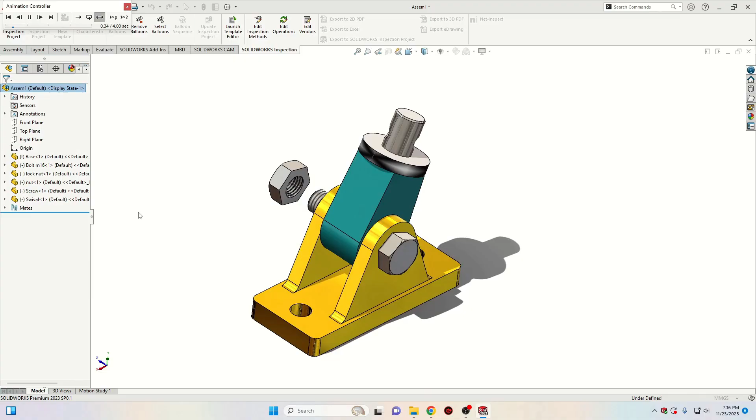We have here the drawing. It's not my drawing, as you can see. I found it on Pinterest, from CAD/CAM tutorial. So I don't intend to steal it or anything like that, but I'm gonna use it to make my own tutorial.

And we're gonna start with the base. As we can see here, we have 6 components. So let's go ahead and start it. This is how it's going to look at the end. And we can see on the drawing we also have a material, so we're gonna apply that material.

Alright, let's open a new SolidWorks document, select here part, and now let's select here plane and let's open a sketch in the top plane. And here to make that base we'll start with a center rectangle.

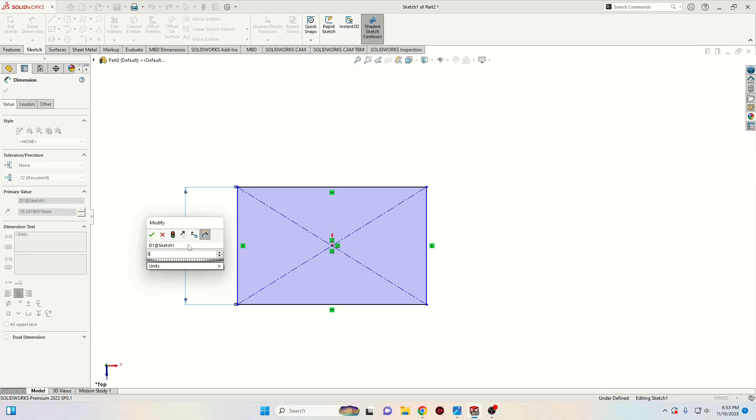And now it's smart dimension, let's define it. First here will be 58 millimeters, and here will be 132. And now let's make a center line, make it vertical like this, and then select circle, and let's make a circle here.

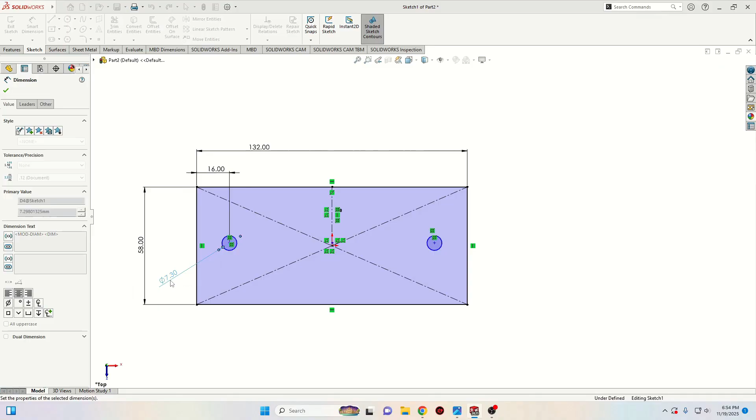Select this circle with this center line and select here mirror entities command. And now it's smart dimension, let's define this. From this center point to this line here will be 16 millimeters. And this circle will have the diameter 14. And now select this center point with this one and select here make horizontal.

Now go to features, use extruded boss base command, and here the thickness - first here we'll keep blind, and here the thickness will be 14 millimeters. Press here OK.

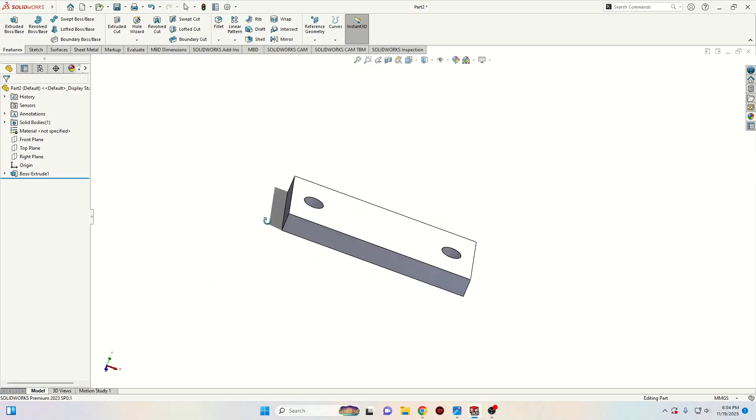And now let's open a sketch in the front plane, where we're gonna make the next sketch. Select line, and we'll start like this, and here we'll make an arc, and then back to this point. Now select this point and select here make tangent. Now select these two lines and make them equal.

Select this center point with this origin point and select here make vertical. And now it's smart dimension, let's give a radius for this arc, and here will be 20 millimeters. And then this line here will have 75. Okay, and now from this center point to this edge here will be 54.

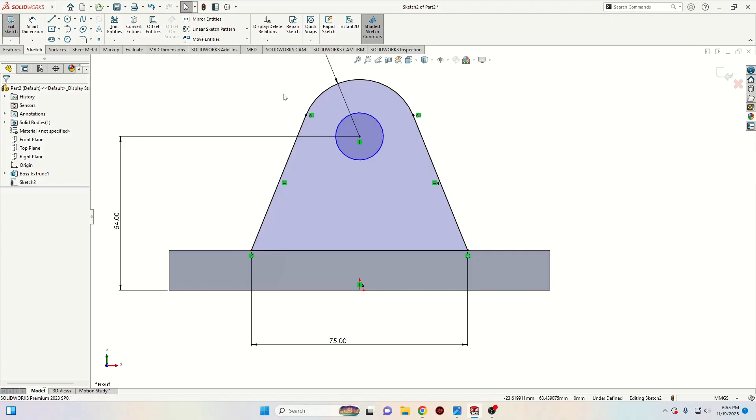And now select circle again and let's make another circle in this center point. Make sure that it's concentric with this arc. And now smart dimension, let's give a diameter for this circle and it will be 16 millimeters.

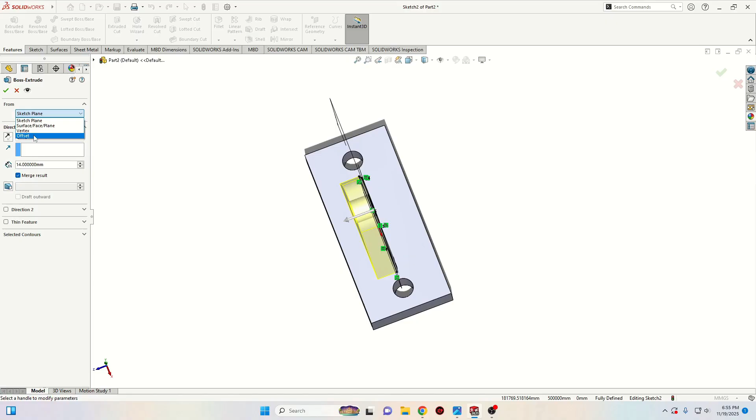Alright, and now we'll go to features and we'll use extruded boss base command. First we're gonna select here, instead of sketch plane at from, we'll select offset. And the offset will make it 16 millimeters. And then here we'll select blind and here we'll make it 10 millimeters. And this should be good.

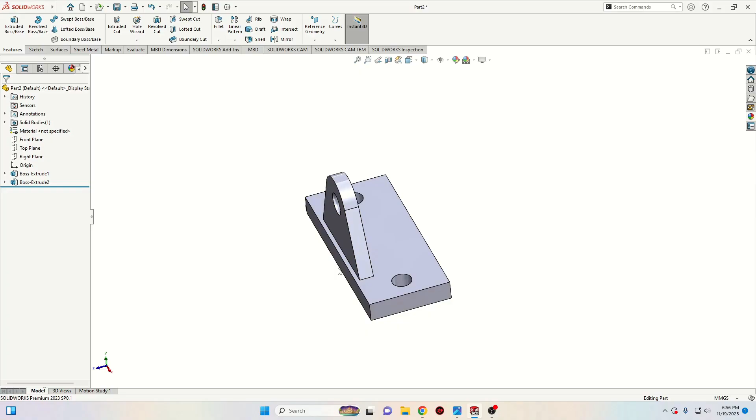Press OK. And now from the drawing we can see that this should have the thickness 10 millimeters, and from this face to this one should be 3 millimeters. To check that, we'll go to evaluate, select here measure. And first let's check from this face to this one. We can see the distance is 3 millimeters, as stated on the drawing.

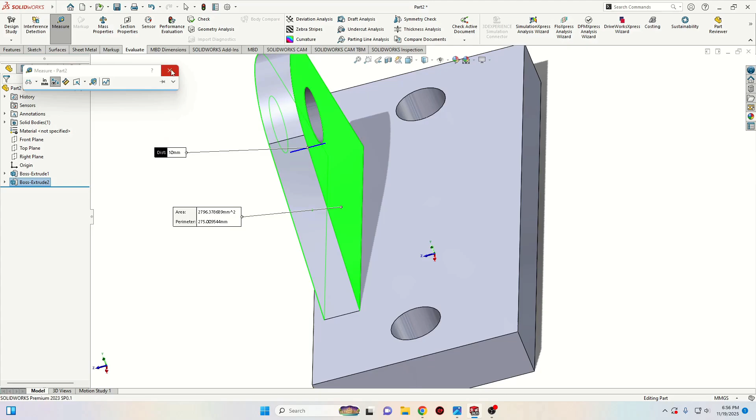And now let's check the thickness for this. It's 10 millimeters. That's good. And I'll have to make another one like this on this other side.

To do that, we'll go to features, extruded boss base command. We're gonna use the same sketch. Go to boss extruded 2, select sketch 2. The same, we'll select here offset. This time we'll have to reverse the direction.

And this will be the same distance, 16 millimeters. And here we'll have to reverse the direction again, and it will also be 10 millimeters. Now from the preview it's looking the same.

Press OK, and now we have the second one. Now what we'll have to do is to apply some fillets. So select fillet, the radius will be 5 millimeters, and we'll select first this edge.

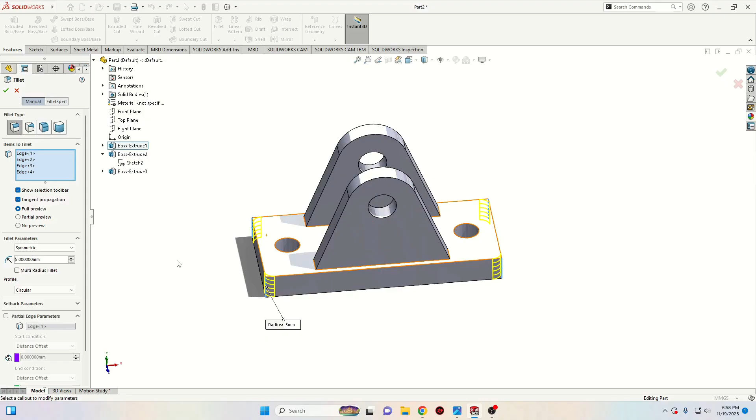And we'll go ahead and select this one, connect it to start loop. We must have all these 4 edges, and then we're gonna select this one, and we'll select this one, connect it to start loop again to have these 2, or you can just select them like this. And in total we should have 8 edges. Press OK.

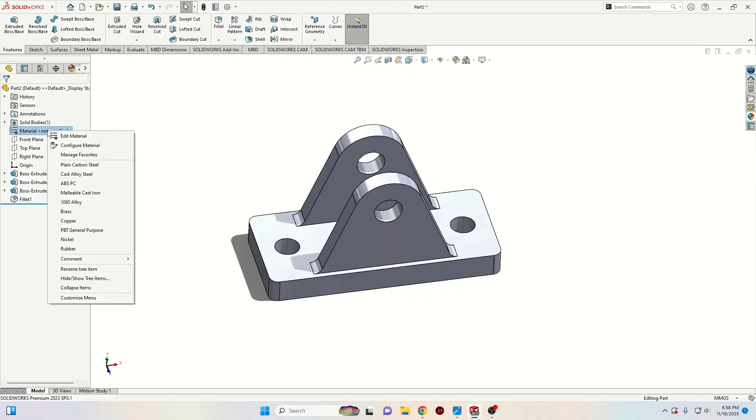And now this should be the base. And what we'll have to do next is to apply the material. So right click on material, edit material, and we'll select this one. AISI 1020, you can see here the density, and press here apply and close.

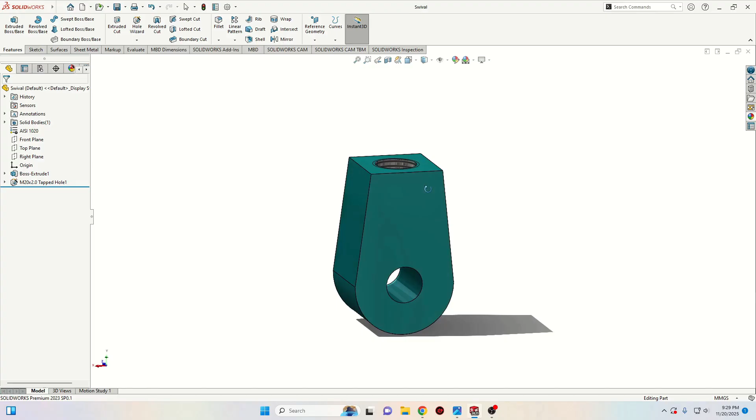This is how it's going to look. It's very easy. Now let's open a new SolidWorks document, select part. Let's make this plain white, and let's open a sketch in the front plane.

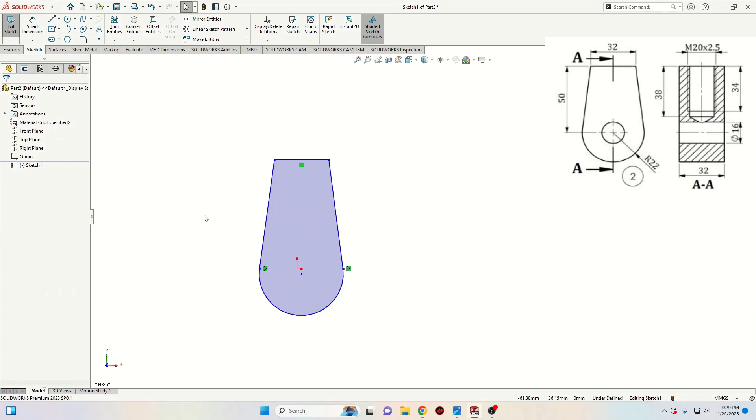Here we'll make the next sketch, and now we'll make an arc. Select Smart Dimension and let's define this. Here will be 32 millimeters. And here will be radius 22. From this point to this line here will be 50.

Now let's make these 2 equal, and let's make these 2 vertical, sorry. Now select this one with this one and select coincident. Okay, now let's select circle again and make here another one. This one will have the diameter 16.

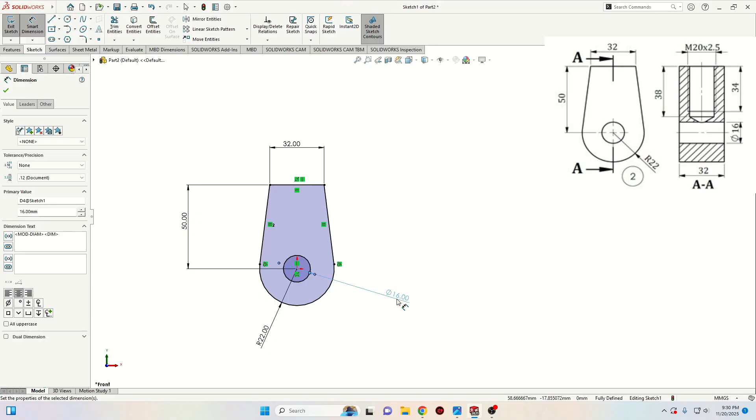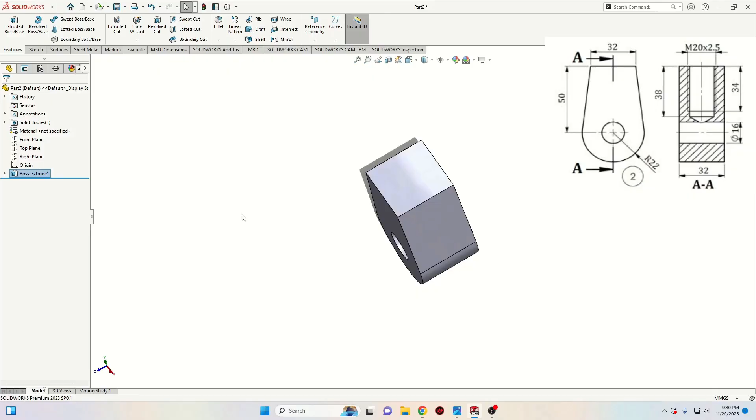And now go to features, use extruded boss base command, and here we'll select mid plane, and the thickness will be 32 millimeters. Press OK. And now we'll have to make that hole.

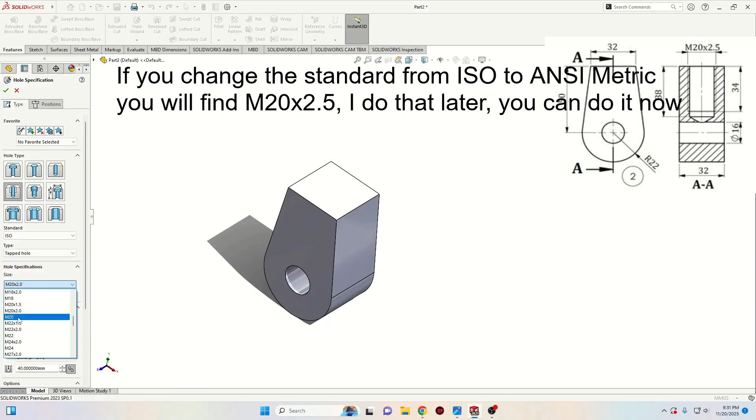To do that, we'll go to hole wizard. Select hole wizard. We're gonna select this one, straight tap. Here standard will keep ISO, and here we'll select tapped hole. Here the size, as we can see, is M20 with the pitch 1.5, 2, and M20 simple. So we're gonna use this one.

Let's see, for M20 simple there's no pitch. Alright, so we're gonna use pitch 2 instead of 2.5. And here end condition will be blind. This will be the depth for our hole. And we select here depth up to shoulder, and it will be 38. And here the depth for the thread will be 34.

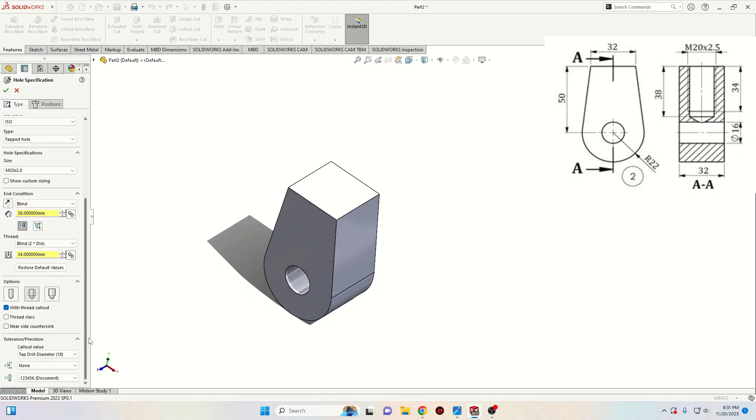Alright, and here we'll keep this one, cosmetic thread, and everything else should be the same. Now go to positions and select 3D sketch. We're gonna place it like this, and then to position it, we'll select center line, and we'll make a center line like this, and then one like this. Make sure that this one is in the middle point for this edge, and this one starts from this middle point from this edge. And this one should be along x-axis, and this one should be along z-axis.

And I will select this point with this point from the hole and select here make coincident. Now this is in the center. Press here OK. And now this is the hole. Now we cannot see the thread.

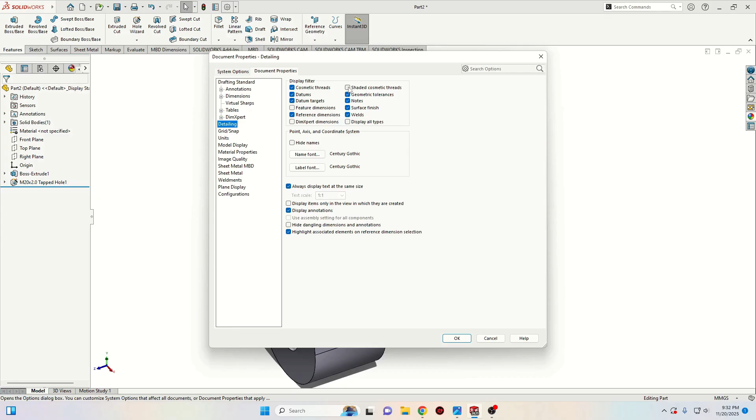To see the thread, go here to options, go to document properties, go to detailing, and we can see here on the right shaded cosmetic threads. Select this and press OK. And now we can see the thread.

Now what we'll have to do is to apply the material. Right click here on the left on material, edit material, and we'll have to select from steel this one. Press here apply and close. And this is the second part from this assembly. Don't forget to save it.

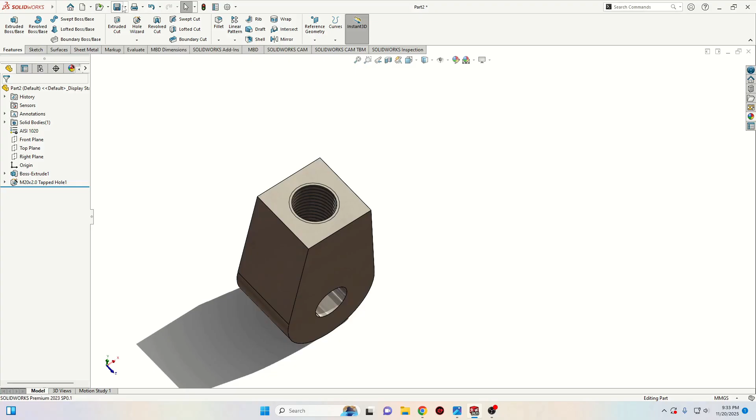This is going to be very easy. Now let's open a new SolidWorks document, select part, and let's make this plain white. Now we'll open a sketch in the top plane. And here we'll select circle and we'll make a circle with diameter 16 millimeters.

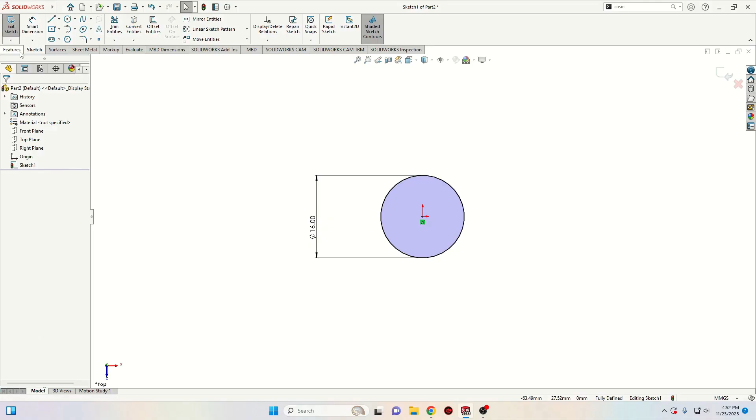And now go to features, and here we're gonna use extruded boss base command. And here will be 68 millimeters. Press here OK. And now we'll select this face and we'll open a new sketch.

We'll select polygon and we'll make one like this. Then select this center point with this point and select here make vertical. And now with smart dimension, let's give a dimension from this point line to this line. And here will be 25.

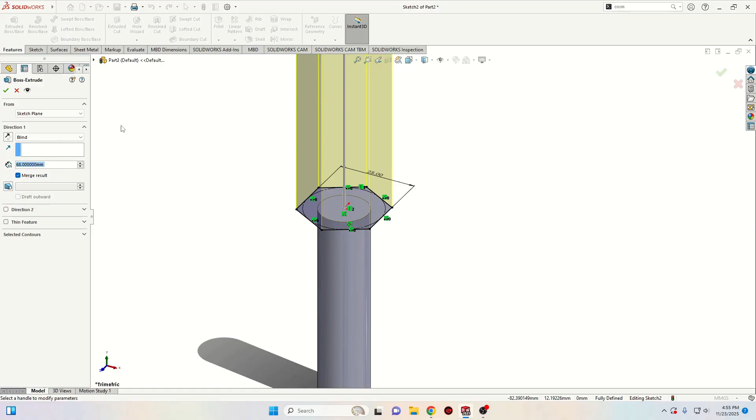Now go to features, use extruded boss base command again. And here will be 10 millimeters. Press here OK.

And now let's open a sketch in the right plane. And here let's start with a center line. Make it starting from this midpoint to this one. And now we'll select 3-point arc. And let's make here an arc.

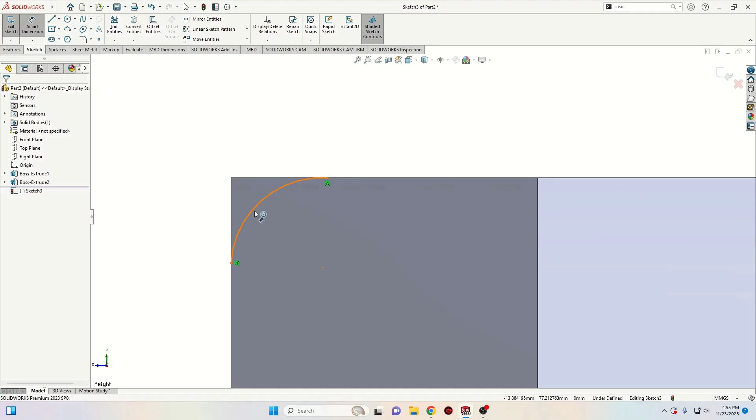Make it like this. And then with smart dimension, let's give a radius. Here will be 2 millimeters. And now select line and let's close this sketch like this. Then select this point and select here make tangent. Do the same with this one.

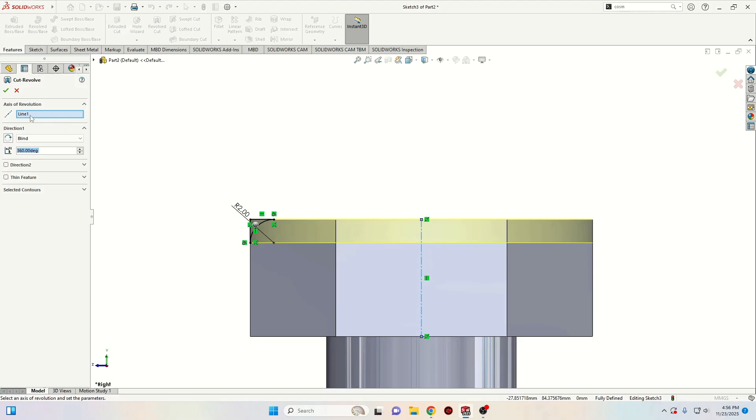And now we'll go to features again and we're gonna use revolved cut. This center line should be selected here and here we'll keep these settings. Press here OK.

Alright, and now for this thread here, that is a cosmetic thread. So we don't have to do many things about it, we'll just have to find it. If you don't know where it is, you have to go to Insert, Annotations, and then you can find it here, Cosmetic Thread.

You can go up here to the right at this search icon and just write cosmetic and it should appear. And if you want to see where it is, show command location, click on this eye icon and it's going to get you to the command you are looking for. See, right here from annotation, it's going automatically there. So yeah, let's insert it.

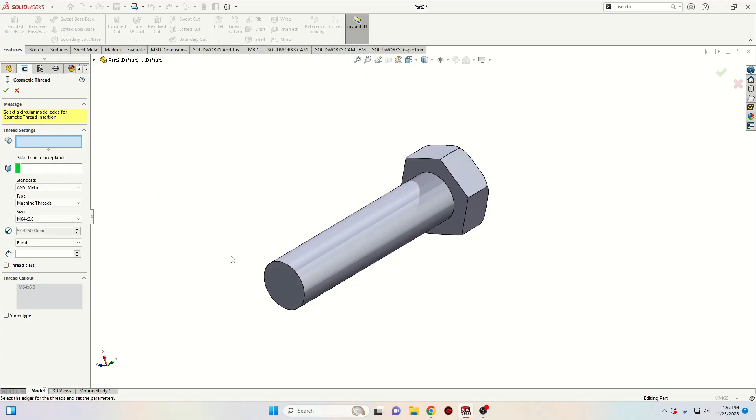So select cosmetic thread. Here we'll have to select the edge. The starting edge will be this one. Here the start face or plane, we can select this one. And here at standard, I am always using ISO, but the problem is that we don't have M16 with 2 millimeters pitch.

So I've seen that at ANSI Metric. Here it is. We're gonna keep the type machine threads and the size M16 with pitch 2. And here we'll keep blind and here 20 millimeters. And now press OK.

Now we cannot see it because this is cosmetic. We'll have to go up here to Options, Document Properties, Detailing, and then select shaded cosmetic threads. Press OK, and now we can see it. Now the last thing that we'll have to do is to apply a chamfer. So select chamfer. The dimension will be 1 millimeter, and the angle will be this one. Select this face or this edge and press OK.

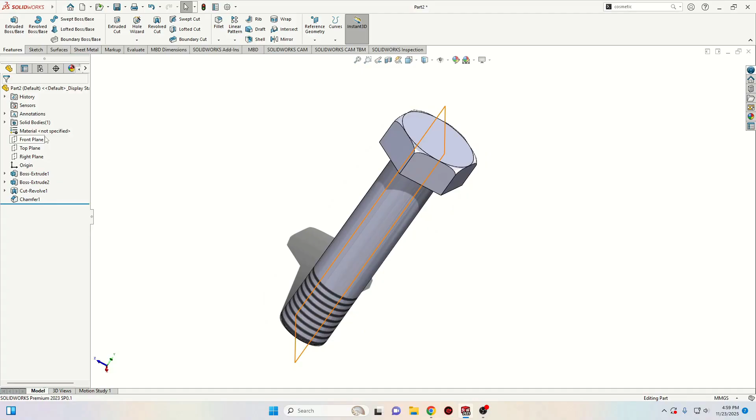And now let's apply the material because we have it on the drawing. Right click on material, select edit material. All the components will be from this material, steel AISI 1020. Click apply and close. Alright.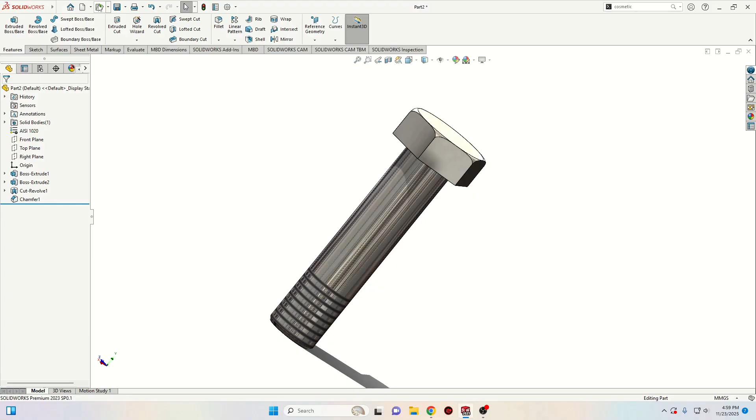And now the last component, the swivel, let's open it. We have to change something, this hole right here, because I couldn't find the one with the pitch 2.5 as specified on the drawing. Right click on it, select edit. It's because at standard I'm always using ISO, but if we go again to ANSI Metric, we have the size we need, M20 with pitch 2.5.

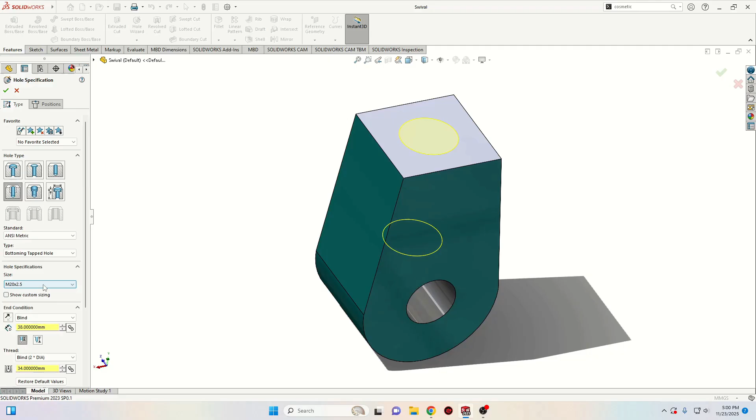So let's change this one to M20, because this is how it's on the drawing, and keep all the other settings the same. Press OK. And now everything is according to the drawing. Don't forget to save them both.

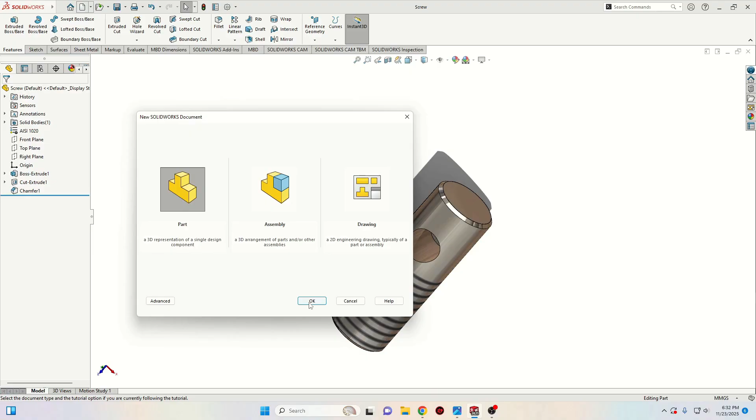Let's go ahead, we're gonna start with this screw. So let's open a new SolidWorks document and make it plain white. Now we'll open a sketch in the front plane and select circle. This circle will have the diameter 20 millimeters. Go to Features, use Extruded Boss/Base command, and here will be 56.

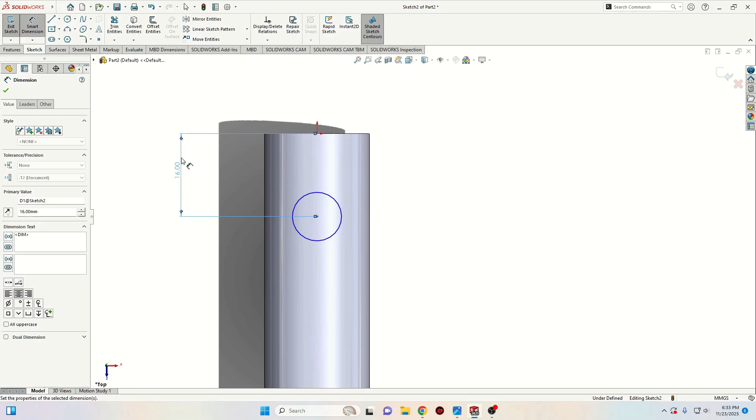And now we'll open a sketch in the top plane. We'll make a circle. With smart dimension, let's give a dimension from this center point to the origin point, 16 millimeters. And this circle will have the diameter 10.5. Now select this point with this one and select make vertical. Go to Features, use Extruded Cut, and instead of blind select Through All - Both. Press OK.

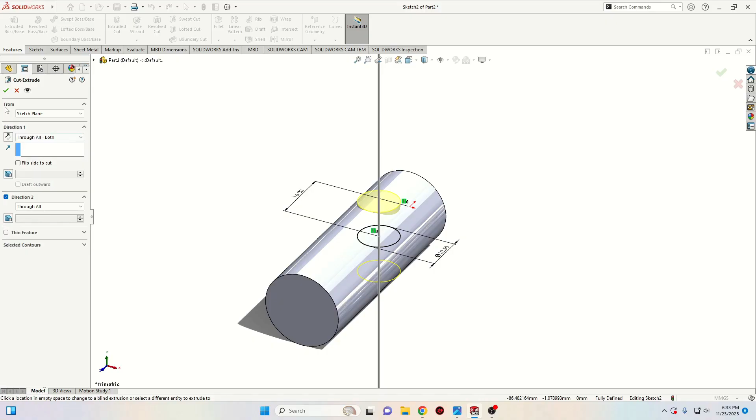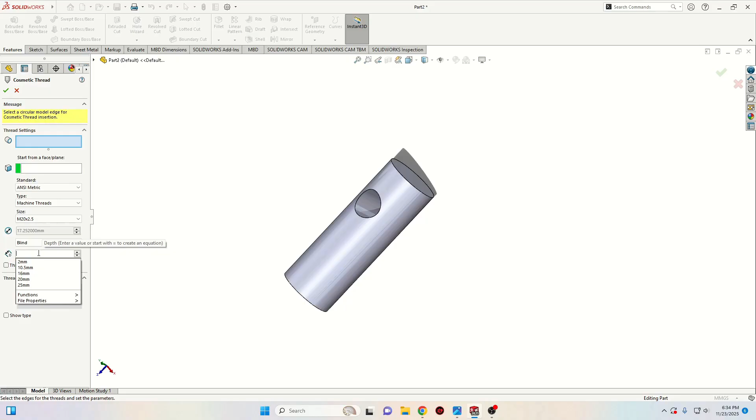Now I'll have to apply a cosmetic thread, actually a thread, not a fillet, on this side. Go to this arrow, Insert, Annotation and select Cosmetic Thread. Here we'll select ANSI Metric, machine threads, and the size will be M20 with the pitch 2.5. Select blind, and here will be 32 millimeters. Select the starting edge, this one, also this face, and make sure these are the same. Press OK.

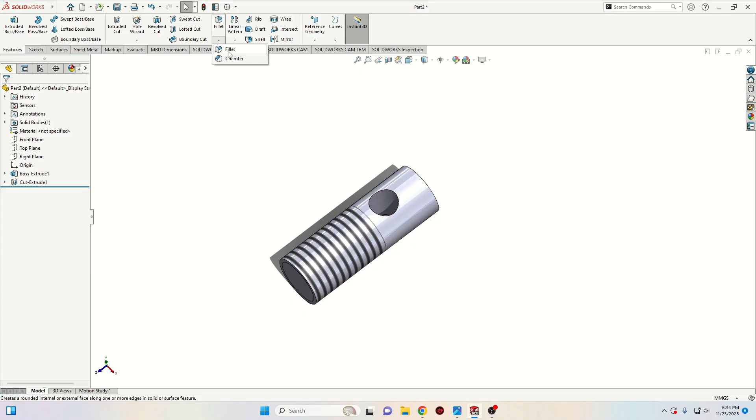And now to be able to see this thread, go up to Options, Document Properties, Detailing, and select cosmetic threads and press OK. Now we'll have to apply a chamfer, so select chamfer. The dimension will be 1 millimeter, this face with this one. Press OK.

And I'll have to apply the material. Right click on material, edit material. All the components will be from this material. Click apply and close. Nice. Now don't forget to save this one, and let's go to the next one. So let's open a new SolidWorks document, part.

The next one will be the lock nut. Let's make it plain white. And now we'll open a sketch in the front plane.

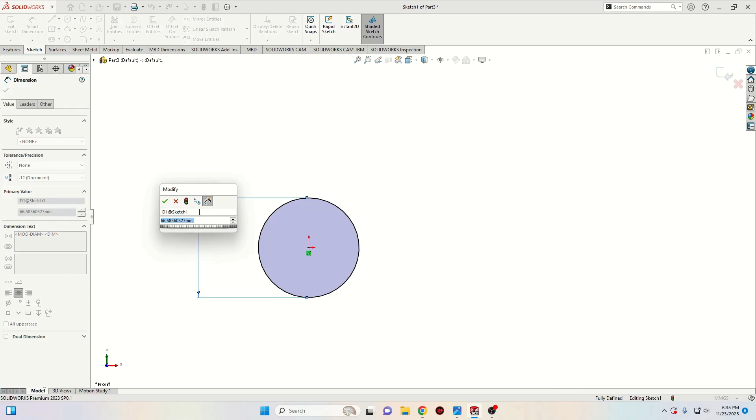Here we'll make one circle. This circle will have the diameter 45. Now go to features and use extruded boss base command, and here the thickness, or the depth, will be 8 millimeters. We'll keep it blind, press OK.

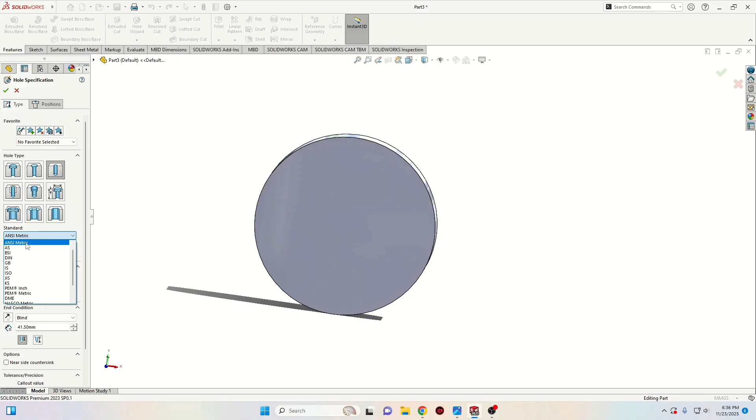And now we'll select hole wizard, and here we'll select hole. Here we'll keep it symmetric. Here we'll select drill size, and here we'll select size 18 millimeters. Let's see if we have it. So let's go ahead and select 18 or 18.5, one of these should be good. We're gonna make it a little bit smaller than our size on the drawing.

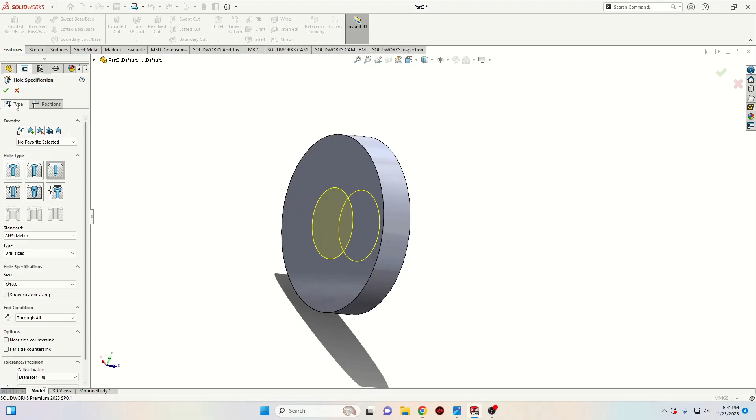Press OK. Actually go to positions, and we'll have to put it in the center of this part. Place it on this face, then select this face with that point and select make concentric. Now press OK.

And now let's see how we can make this thread here. Let's try with cosmetic thread first, then we're gonna go ahead and use this thread from hole wizard. This is more like a real thread because it's gonna cut into this part or extrude, but in our case it will cut. So let's go ahead and use the cosmetic one first.

Go to insert, go to annotation, go to cosmetic thread. Here we're gonna start this. We're gonna select the starting edge, will be this one. And let's see if we can select M20, but we cannot select the pitch 2.5 for some reason. Maybe it has something to do with the dimension of this hole. Anyway, you can use this one. This is just an example, we're not gonna let this one.

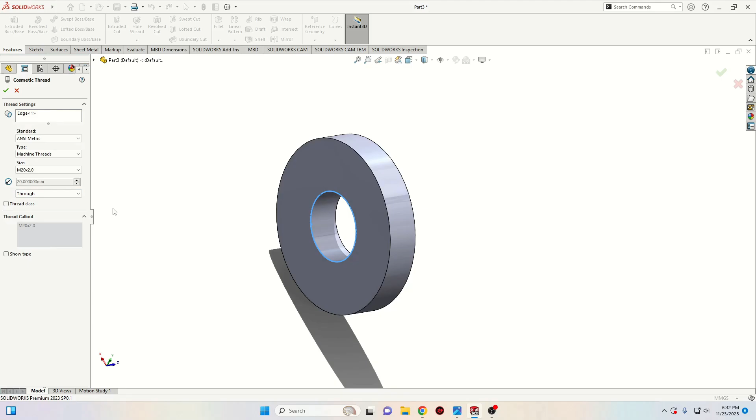And here we're gonna select up to next, or through. I think it should be good, and let's see how it's going to look. Let's go to options and let's make it appear, detailing, shaded. Okay, so it's looking good. We can leave it like this, or let's undo this.

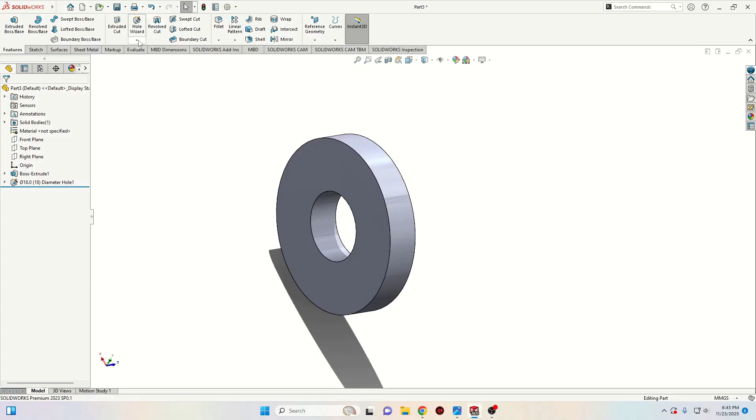We can go to hole wizard, to thread. We'll select the starting edge, will be this one. Here let's make an offset of 2 millimeters and reverse. Here let's keep blind and let's make it 12.

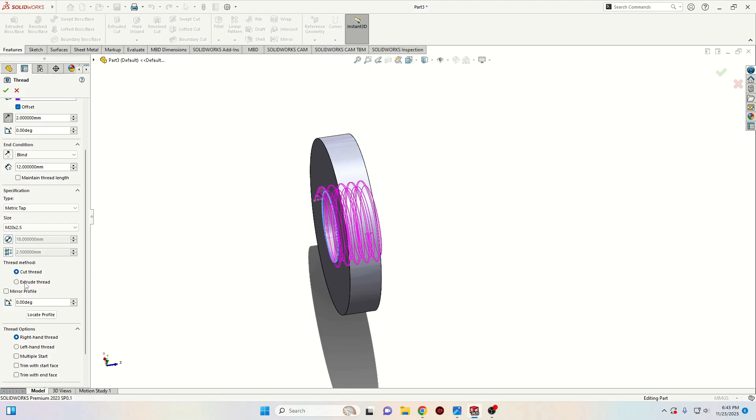Here we're gonna keep metric tap, and here we can select the size we want, M20 with the pitch 2.5. Everything else should be the same. Make sure that here is cut thread, not extrude thread. Press OK. And now this is how it's going to look with this thread, actually real, not just cosmetic. So it's up to you which one you want to use, it has no real importance.

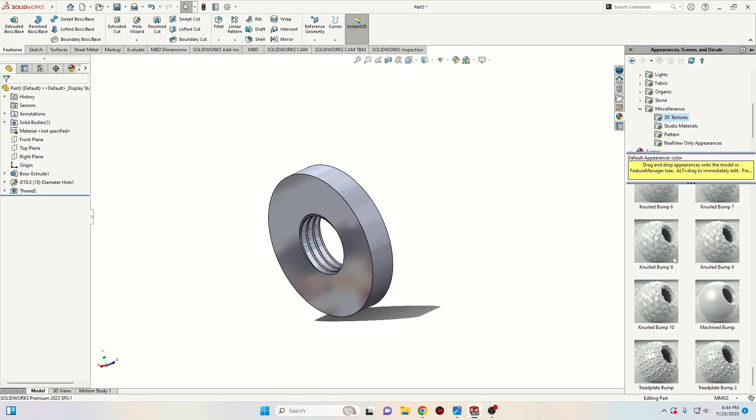Anyway, let's get to the next thing. So what we'll have to do next is change the appearance of this face, because on the drawing it's saying that it's a knurled surface. To do that, we'll go to appearance right here, go to this arrow, appearance, go to the last one, miscellaneous 3D textures. And from here, if we go down, down, down, we can see a lot of knurled options. Just choose one from here, drag it and place it on this surface, and here select face, because we only want this to be on this face.

Alright, now let's apply the material. Right click on material, edit material, and it will be the same material, apply, close. Nice. Now don't forget to save it. So this is the lock nut.

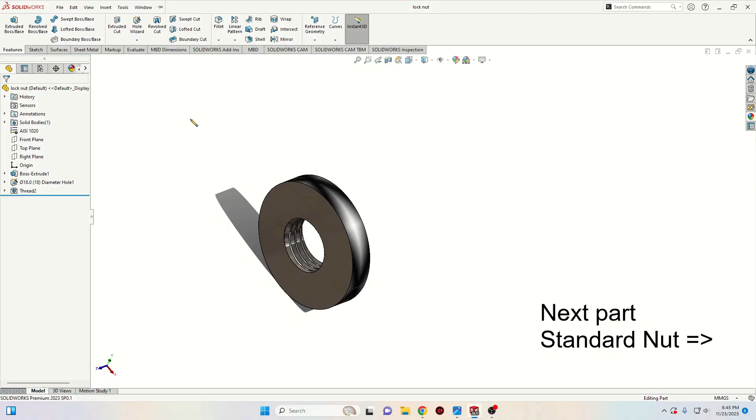Okay, now we'll have to do the last part, which will be the simple nut. Let's open a new SolidWorks document, and let's make it plain white. Now let's open a sketch in the front plane.

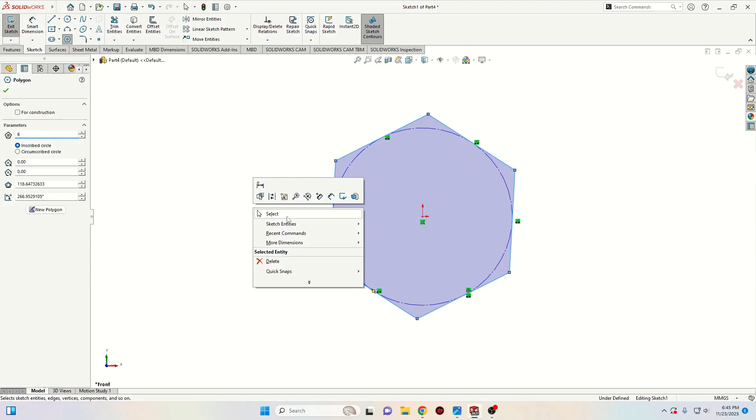And here we're gonna start with a hexagon, a polygon actually, but yeah, anyway. So make a polygon like this, then select these 2 points and select make horizontal. And now smart dimension, let's give a dimension from this line to this one, will also be 25, like it was for the bolt.

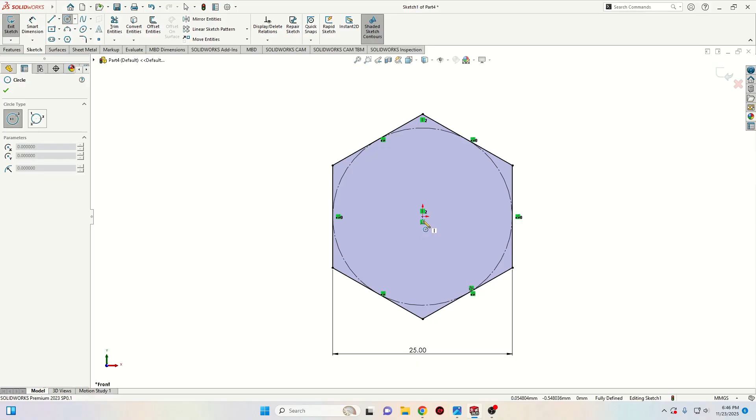And now let's go ahead and make another circle right here. This one will have the dimension 14.

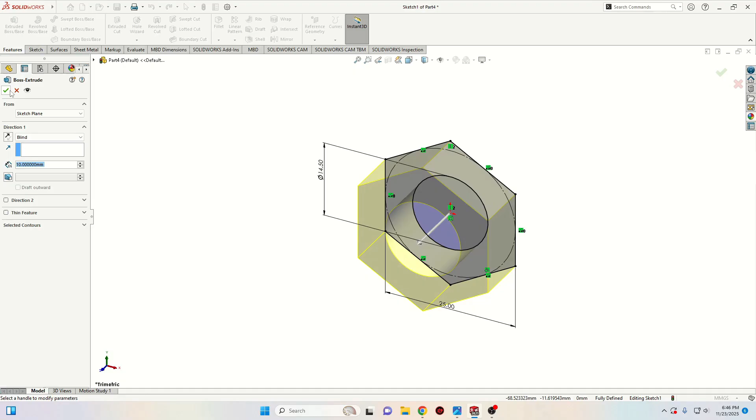Let's make it 14.5. Now go to features, use extruded boss base command, and here will be 10 millimeters. Press OK. And now let's open another sketch in the right plane. And let's select 3-point arc. Let's make an arc like this. Select line and let's close this sketch.

If you saw the tutorial with the bolt, we are doing the exact same thing. Make a center line. And now select this point, make here tangent, this one tangent. Now let's give here the radius, which will be 2 millimeters. Now go to features, use revolved cut, and here should be selected this center line. Press OK.

Now we'll have to apply the thread here. So it should be M16 with the pitch 2. Let's go ahead and use from insert, from annotation, cosmetic thread. We'll keep these settings here and then let's select the size. M16 with the pitch 2. Select this edge as starting point. And here we're gonna keep through. Okay, so I said M16 with the pitch 2.

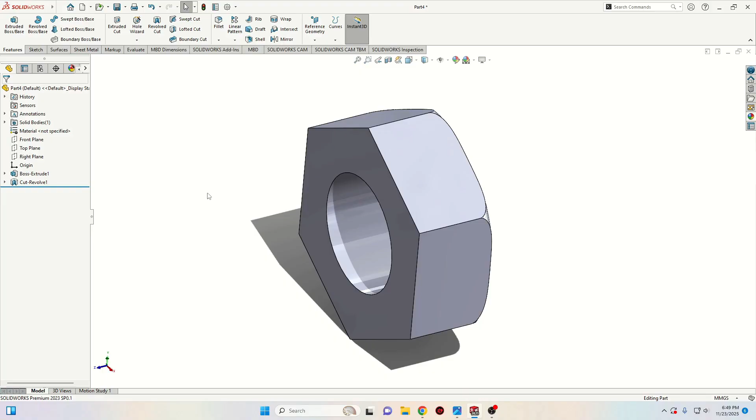Anyway, we can also use the other thread like we did for the other nut, for the lock nut. We're gonna go to hole wizard thread because here we definitely have it. So we're gonna select this. I almost never use cosmetic thread, so offset of 2, reverse, and here is good like this, and the size should be M16 with the pitch 2.

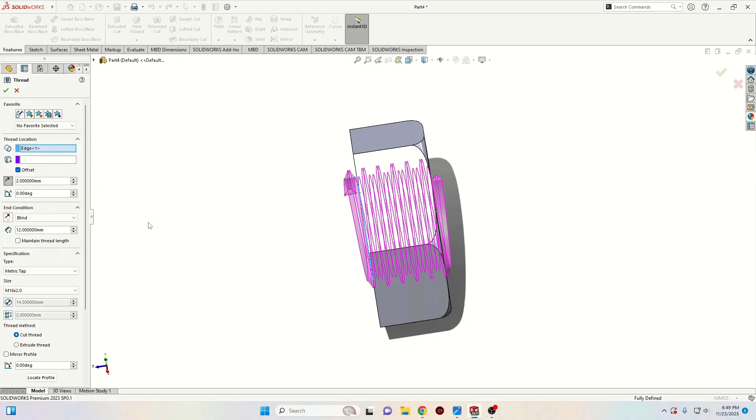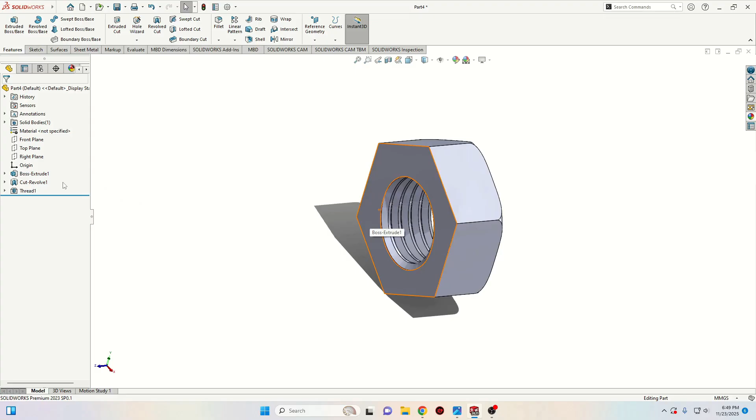Here is way easier, and it's also looking way better. Select here cut thread and press here OK. Now, if you want to use cosmetic thread, you can play with that hole. You can go back here, edit sketch, and you can change this dimension until you'll have there the pitch 2 millimeters for the size M16. But I'm not going to do that because I think it's useless. So I'm gonna leave it like this.

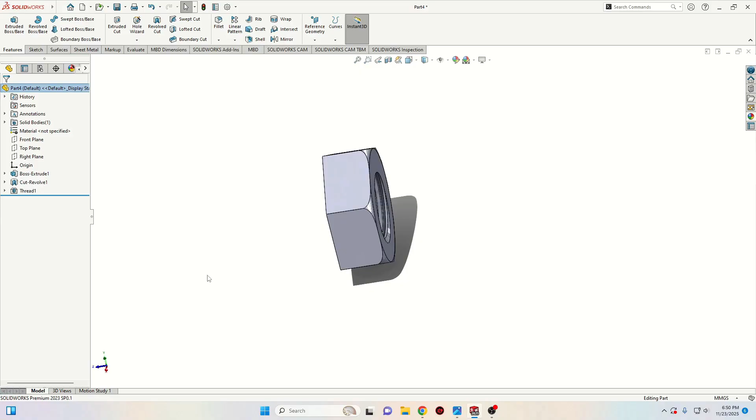Now don't forget to apply the material, edit material, the same one, and close. Now this was the last part. Let's save it.

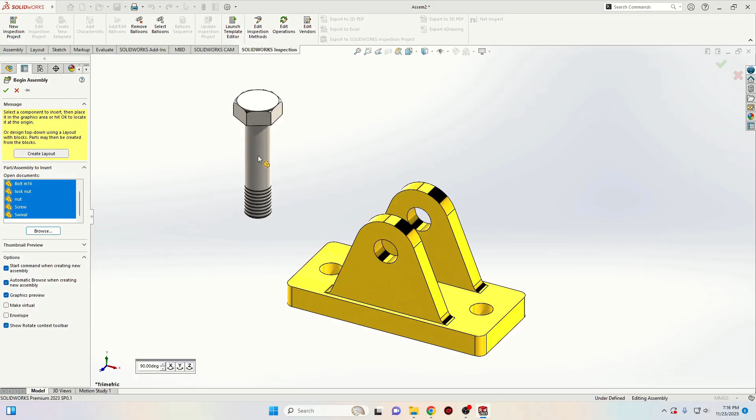We already have all the components, and now let's go ahead and make this assembly. Let's open a new SolidWorks document, select here assembly, press here OK. And now let's browse for our components. So you must have 6 of them in total. Click once for each of them to insert it. And now these are all. Let's make this plain white. And now the first one you will insert is gonna be fixed, so make sure that it's the base. Now let's select this face with this one and select here concentric.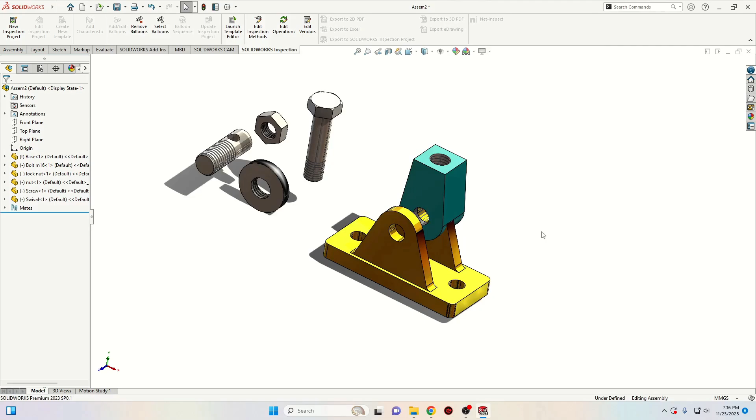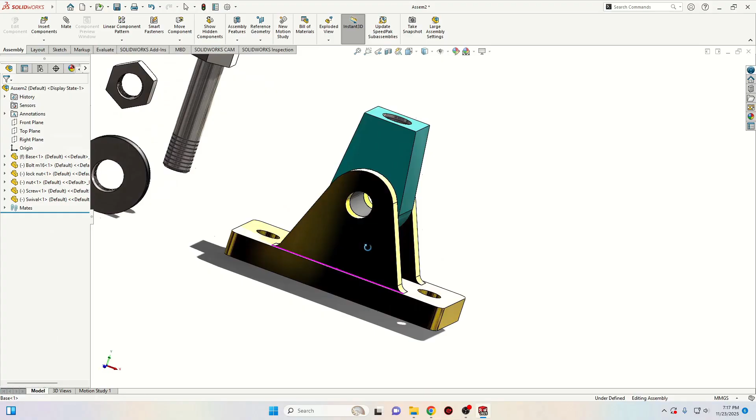And now we'll select these 4 faces and go to assembly, go to mate. And we should have here width. Press OK. Now we have to limit the movement of this swivel a little bit because it's going like this. To do this, first let's find which planes are coinciding for this base and this swivel.

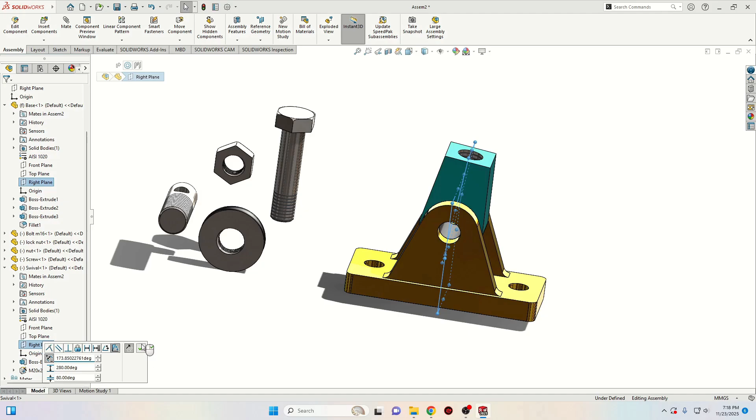To do this, first click on this arrow from the base. We can see the right plane. It's right here in the middle of them. Go to swivel. Let's see if we have a plane just like this, and it will be also right plane. With Ctrl pressed, select them both, and then select here limit angle. The maximum angle, let's make it 280, and the minimum angle, let's make it 80. And let's see. This is looking good.

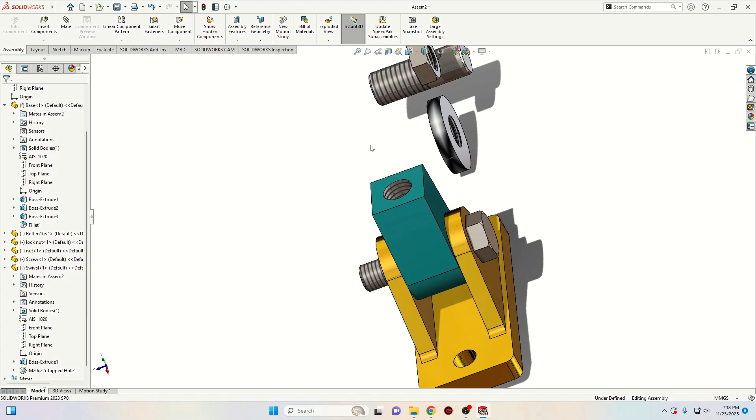And now let's assemble the other components. This bolt, select this face with this one, select here concentric. And now let's drag it a little bit like this. Select this face with this one and select here coincident. Alright, now let's put this nut. Select this face with this one, select here coincident. Select here reverse the direction, and now we'll select this edge, a round edge with this face, and select here concentric.

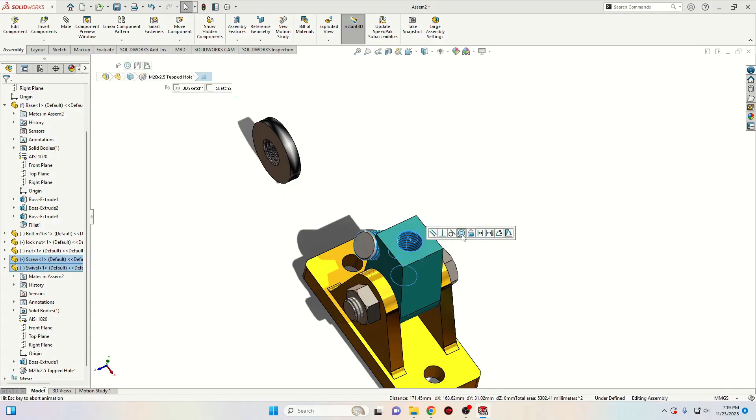And now let's insert this screw. Select this face with this one and select here concentric. Reverse here the direction. And now let's insert this lock nut. We'll have to select this face with this one and select here concentric. And now let's drag it up. Select this face with this one, should coincide.

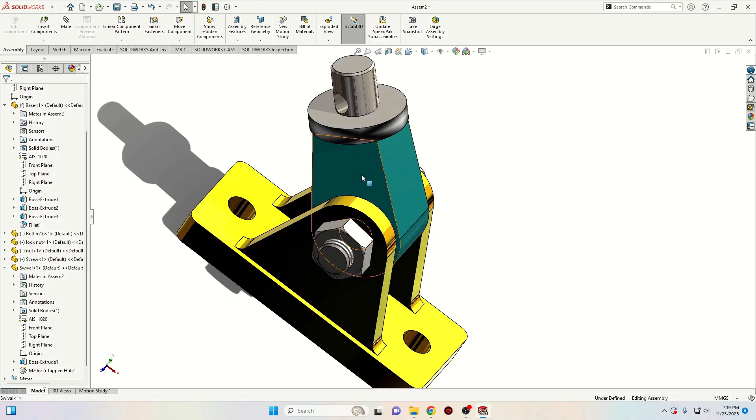And now the last mate we'll have to add is to stop this from moving up and down. And we'll select this face with this one, and we'll select here distance, and here we'll make it 25.

Press OK, and now this is staying in place. Now everything is assembled. Let's see if we move this, nothing is colliding on this side, neither on this side, so everything is looking good. Now this is the assembly of this machinist jack.

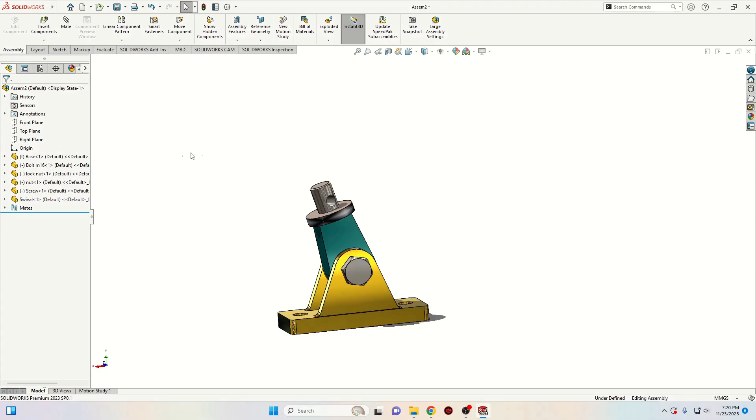Now if you want to make an exploded view animation like you saw at the beginning of this video, it's very easy. After you finish the assembly, you go here to assembly and then you go here to exploded view. And now let's see how you can do this.

First, you must take it logically, like which components are coming out first. For example, from this whole assembly, is this nut the first one, or this one, or this screw? So we're gonna start with this nut, click on it, click on this arrow, drag it outside, and then right click once to move to the next step. Here on the left we can see the steps. So now we have one step, which is taking this nut out of this bolt.

Now the next step is going to be to take this bolt out. So we're gonna click on it, click on this arrow and drag it out. Now if you don't right click right now to move to the next step, for example, let's say that you don't right click, see, now it disappeared. You cannot right click anymore to move to the next step, but you can drag this down and it's going to move to the next step.

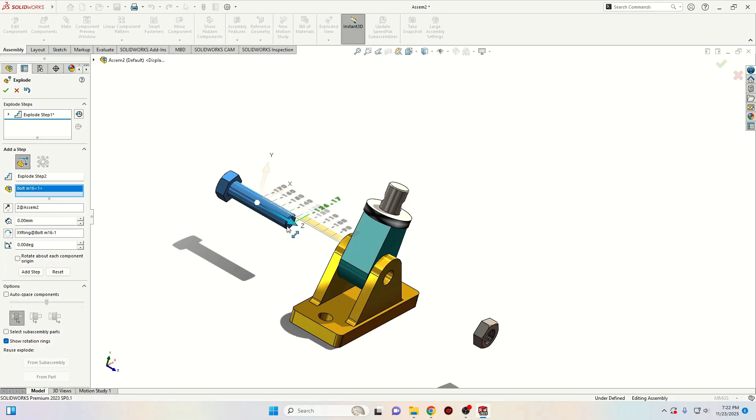Okay, let's go back. So roll back. Let's actually delete this one. Let's say that we are back to step number 2. So you didn't right click, so you didn't move to the next one, to the third one. You drag this one, you don't right click, and now you click on another component and another one, and it's gonna move all of them together, all of them at the same time in the same place. We don't want this. So make sure that after each move you move to the next step. I hope that I am expressing myself right so you can understand.

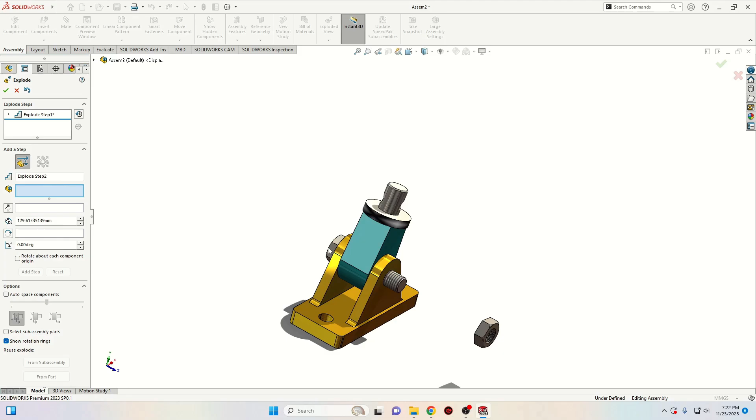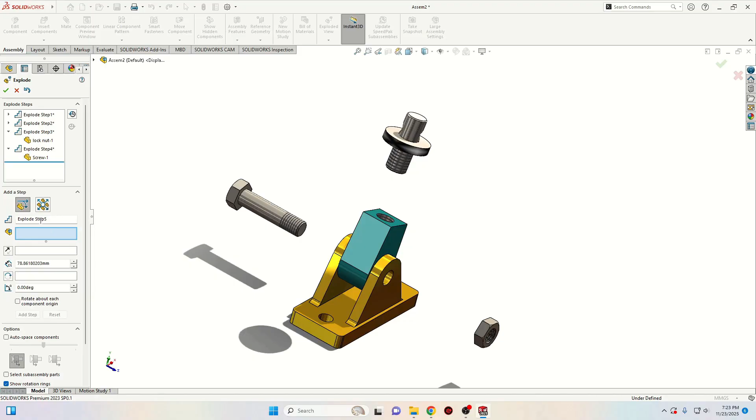So now we are again at step number 2. We only want this bolt to go out this way, right? Right click, and now we are at step number 3. We want to take this nut out, click on it and drag it out. Right click and we move to step number 4, which is, let's say, to move this screw out. Click on it, drag it, and right click. And now we are at step number 5. We can see here the step that we are going to make.

Now let's move this swivel out. Click on it and drag it in the direction you want to move it. Right click and move to the next step. Now if you want to move the base, it's also good. Alright, now you have all the steps. If you want more steps, you can move these components in other directions and so on. After you make the exploded view, press OK. And now your assembly is not assembled anymore.

You'll have to go here on the left to assembly, right click on it, and either click here animate collapse or click here collapse, and it's going to be assembled again. And now if you want to see the animation, right click on this assembly too and select here animate explode. And now we can see all the steps that we made, but they are animated.

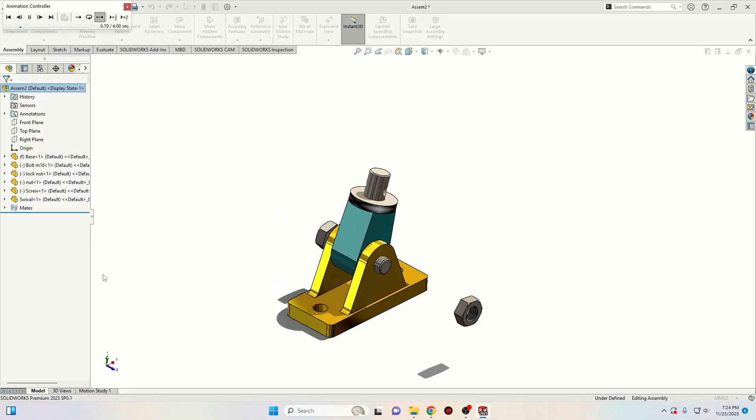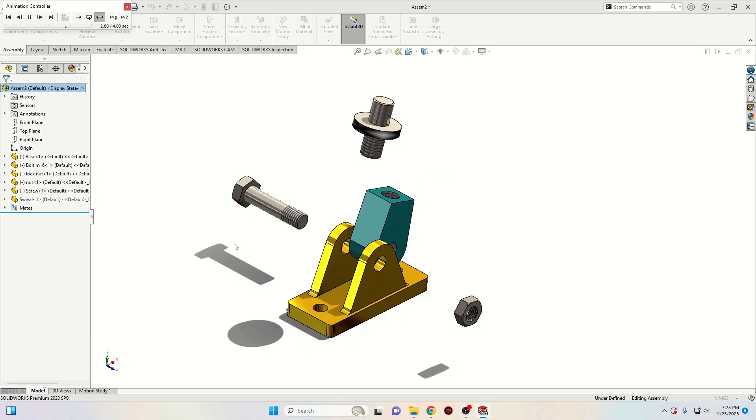See, for example, when I was saying that you have to right click after each of the components you want to move, now this bolt is going outside, kind of to the left, and these two are going up. If we didn't move to the next step after the bolt and we had selected these two also, they would all be going in the same direction and in the same place and at the same time with the bolt. So it's very important to move to the next step after each component you want to make a new move.

Alright, if you want to save this animation, press here pause to stop it and then click here save animation. And here select the type you want to save it as, MP4 or AVI, MKV, and then just click save.